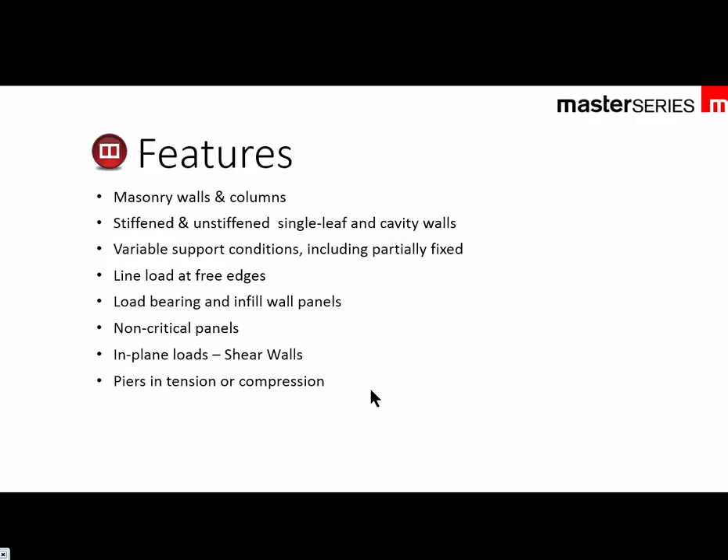Piers can be done in tension or compression, so that we can look at both directions and make sure that we're not missing something. And for those of you who have the PowerPad version, we do not do bed reinforcement. The bed reinforcement is in the full version of the MasterSeries Masonry Design, and likewise openings, either one or two openings, is in the full version.

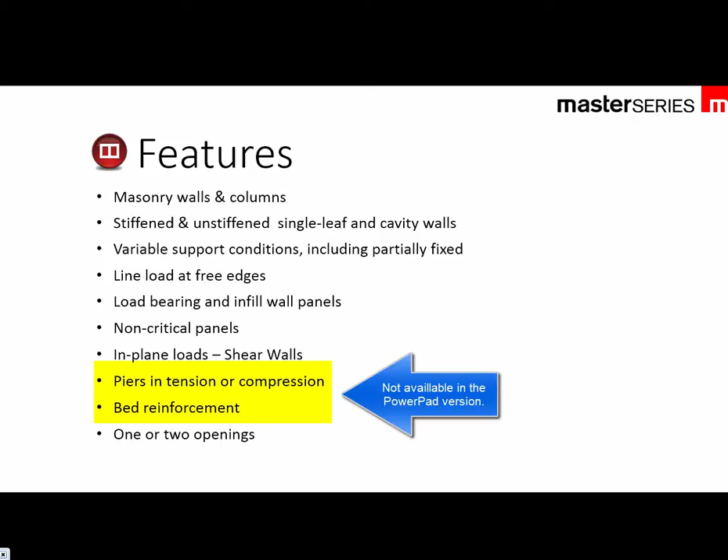Now just close this and stop this for a second. Press escape, and we'll just start on the main MasterSeries.

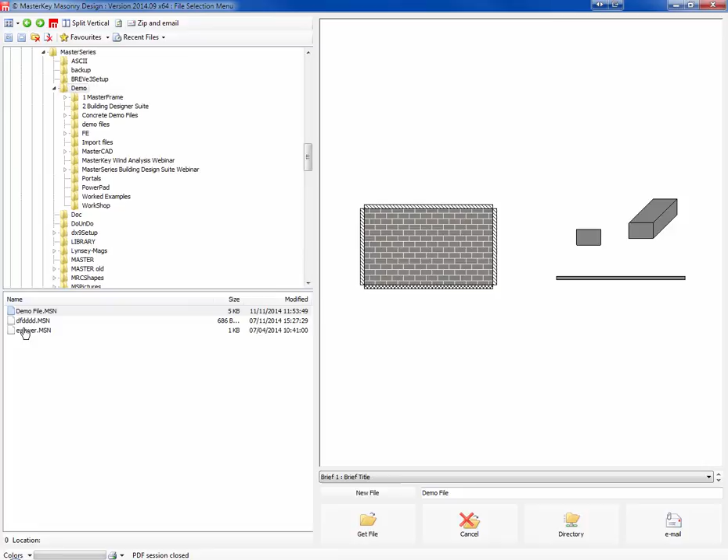So the basics of the program are very simple. It is one of the most simple programs that we have to use. It's still very powerful, but it's simple. Obviously we're seeing our wall, and we're seeing that we've got a lateral load of 0.75 kilonewtons per meter squared. It's a single leaf of 140 thick, and it's got the standard symbol for fixed edge from the code of a cross hatch on the base and a single hatching on the other three sides, indicating that we are in fact simply supported. So fixed base, simply supported edges.

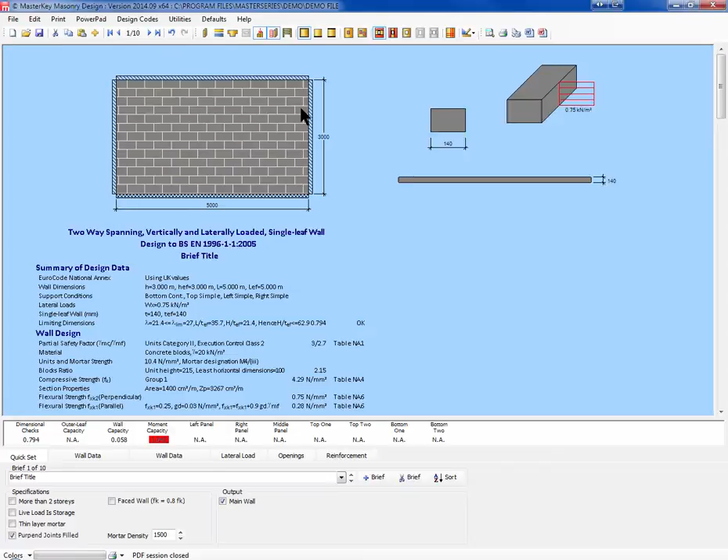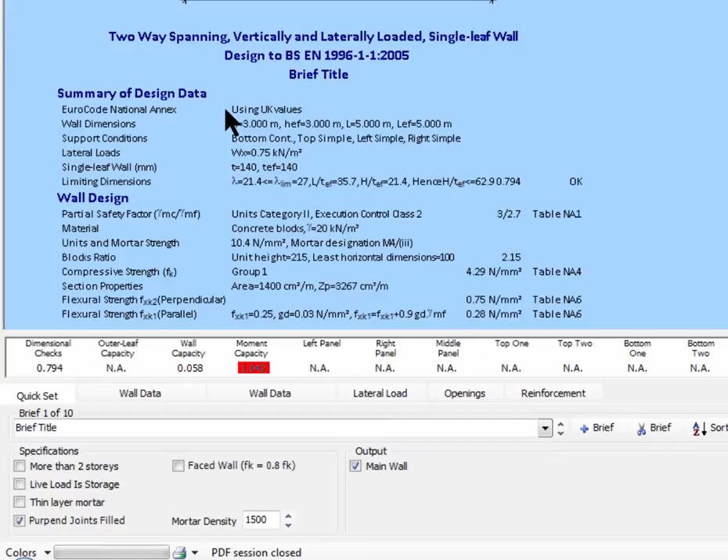The screen's blue, and that is significant. What that's telling me is that the wall is failing. Why is it failing? It is failing on moment capacity. So we can see that we are 4% overstressed, and we will take action to solve that in a minute. But let's look at some of the simple data we have. The wall data. So we mentioned that it was pinned, pinned, pinned.

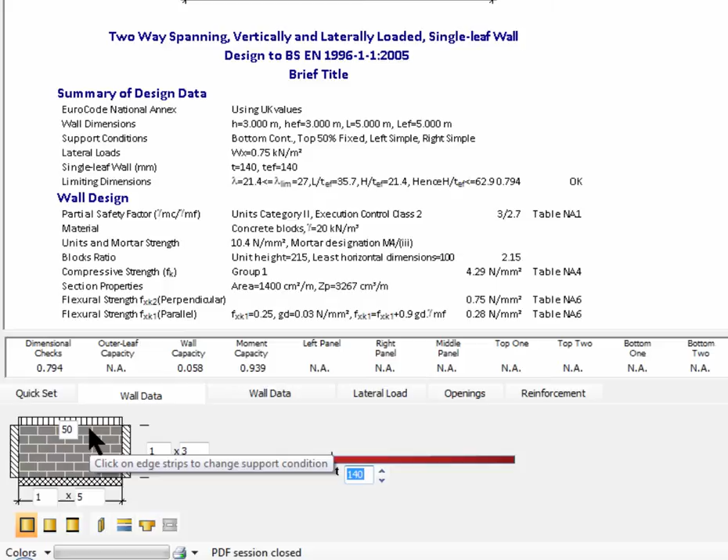And this is very simple. All you need to do is just click on an edge to make it fully fixed. Click on it again, and that's now 50% fixed, not pinned, not fixed, but somewhere in between. If you have a beam support, you might even consider putting in a minus 50%, so it's less than pinned. So it's going to give a wee bit of give, but not totally. And you can return back again, and that's a free edge, so it's unsupported altogether.

Now when we have a free edge, we are able then to apply a line load to that laterally if we want to simulate a load coming from somewhere else, if we were splitting our wall up into different location segments.

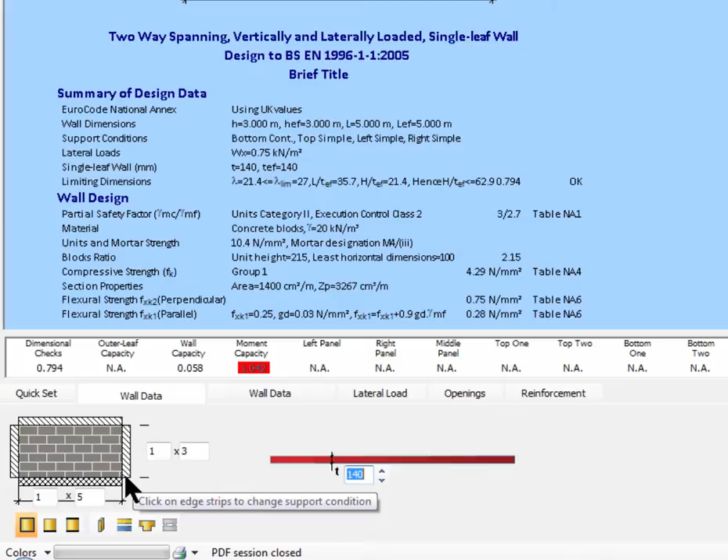So rather than change the fixity of my wall, I could come along and say my single leaf wall will work at 190 thick, or I could go and look at the second wall data tab, and here we have our material strengths. We have our concrete blocks, and of course we have our clay bricks, concrete blocks, calcium silicate bricks, autoclaved aerated concrete, stone, and natural stone. So we're into concrete blocks.

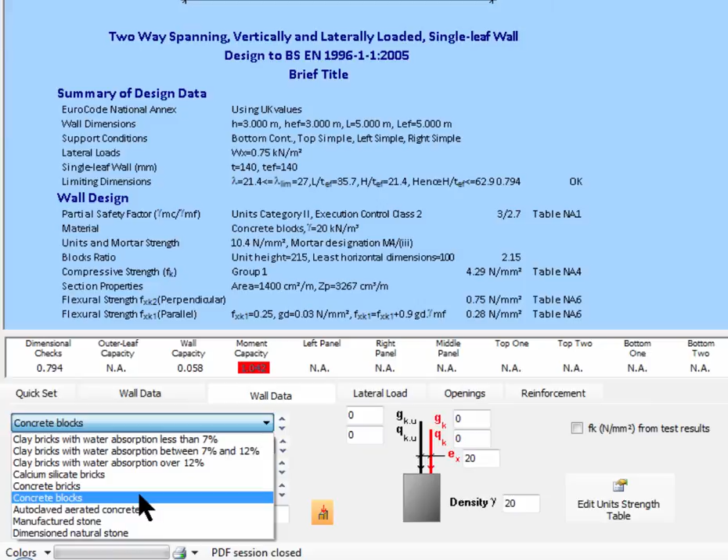Group 1, which means that we don't really have any significant holes in the blocks over 25%. And we're going to go for category 2, execution class 2, the standard unsupervised construction. And that's not working, as we said earlier. What we can do is we can change our strength, and if we go up to 17 Newton blocks, it will work. Or we can turn around and say, well, really, the blocks at least will be manufactured under QA controls, so we'll go for category 1.

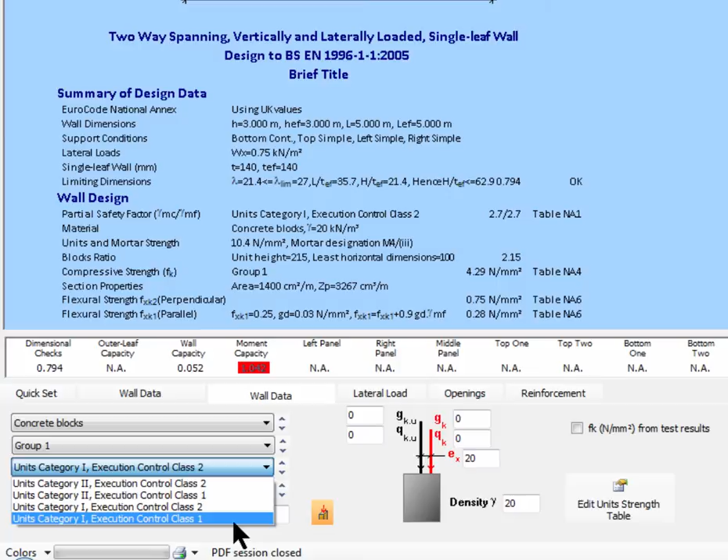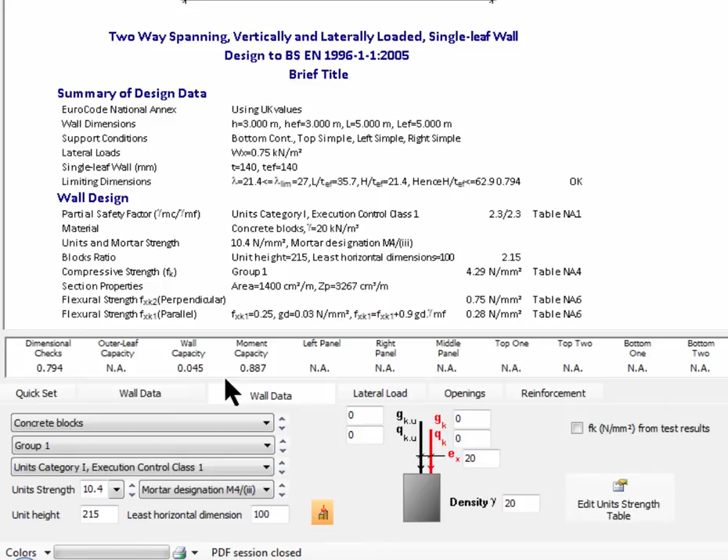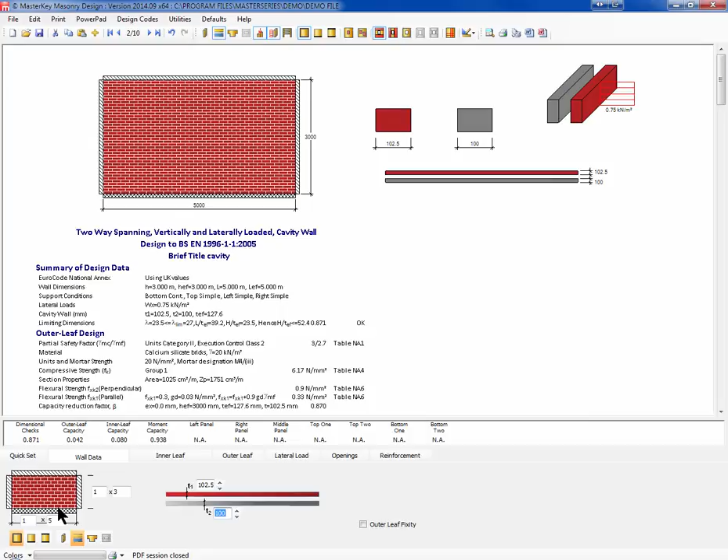So moving forward, we're now into a cavity wall. The same wall, 0.75 kilonewtons per meter squared, with a 102 brick external leaf and 100 internal leaf. Again, fixed, pinned, pinned, pinned. If I just make that pinned on the base, we now see that it's not working. So again, we can see how sensitive the wall is to the changes. We now have the data for the inner and the outer leaves, concrete blocks, group 1, category 2, class 2. So let's go for class 1. So our concrete blocks are class 1 and it's now working.

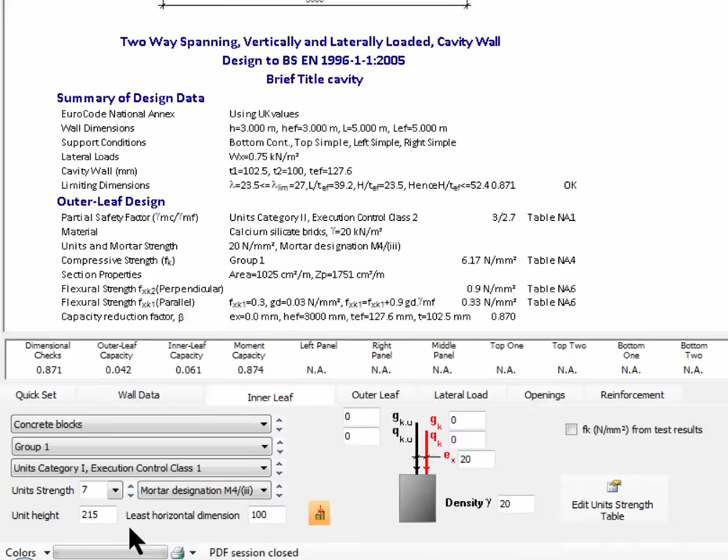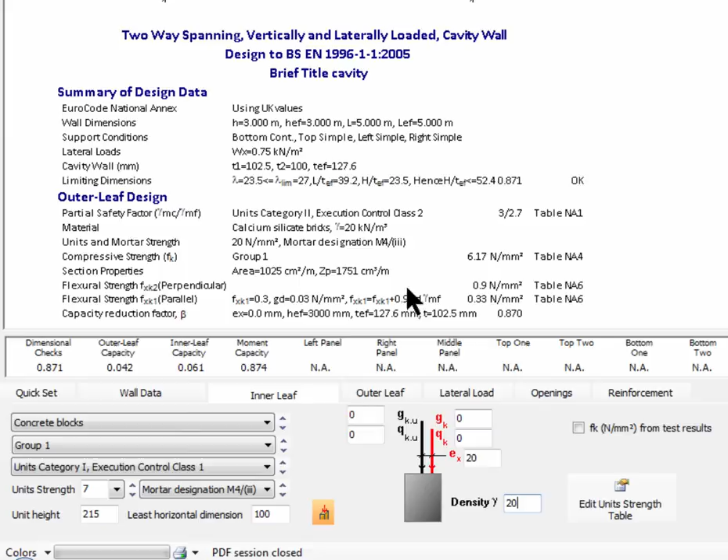What you'll also notice is that we have facilities here for applying additional load onto the wall. By default, if we put a density in, it will be enhancing the strength, so the FXK, and you then have your gravity enhancement to give you an enhanced FXK1 of 0.33. So a 10% improvement in the flexural strength parallel, which is useful. Naturally, if I started to put in some additional loading of say 10, we will see that we also get some additional strength coming out of those loads as well. I make this into 10 and we're now getting a wee bit of improvement.

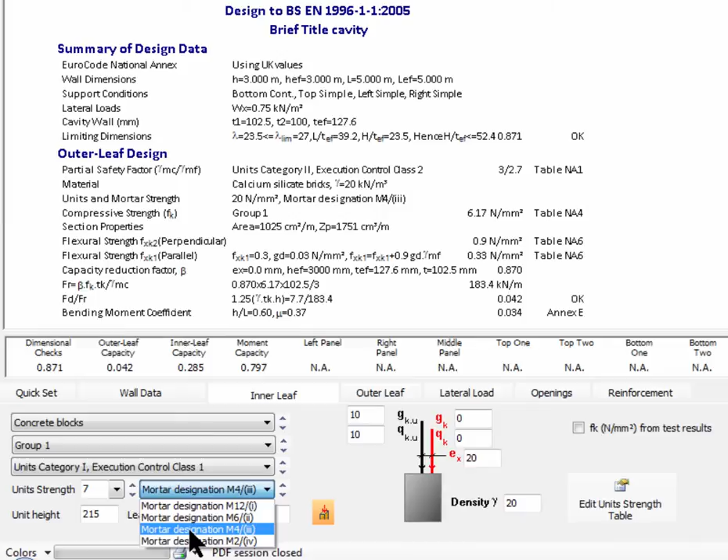There are 4 inputs here for loading, and the reason for that is very simple. These two are concentric from above. So self-weight of an upper leaf, or the loading on a floor from above, the GK and the QK, to quote the BS terminologies, are concentric from above. For loading at this level, we can then put them in eccentric by the default 20 mil or larger value if you feel that's more appropriate. Naturally, we also have the mortar designations, but they don't really give you much variation from the M4 and M6 mortar designations.

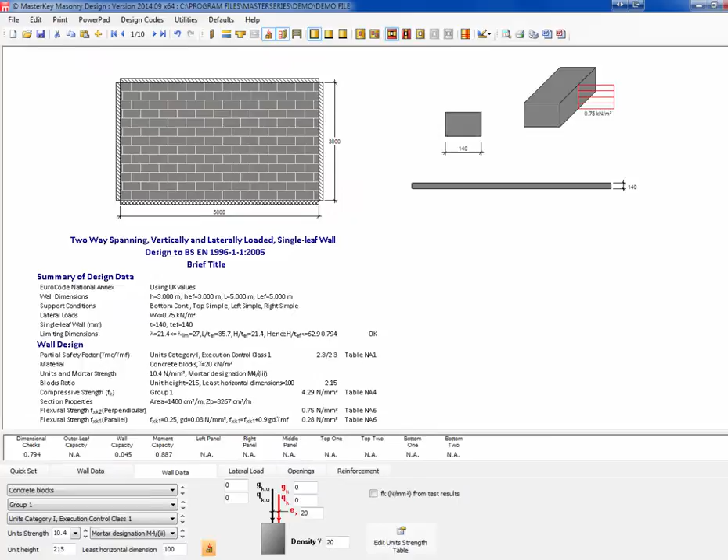Now, I just noticed when I was looking at the questions that came in before the webinar that somebody was asking how do you actually create a cavity wall? Well, if we went back to the first wall, it's very simple. All you do is you tell it that you want it to be cavity, or you tell it that you want to have a stiffened wall. Stiffened cavity wall? Yep, why not? And turn it on and turn it off. So we can turn on and off the options very easily up here. And if we look at these options, we can see that we also have the fixities, so we're actually fixed on all 4 sides, or we can go for a standalone or vertically spanning, and then we will see later on our openings in the walls.

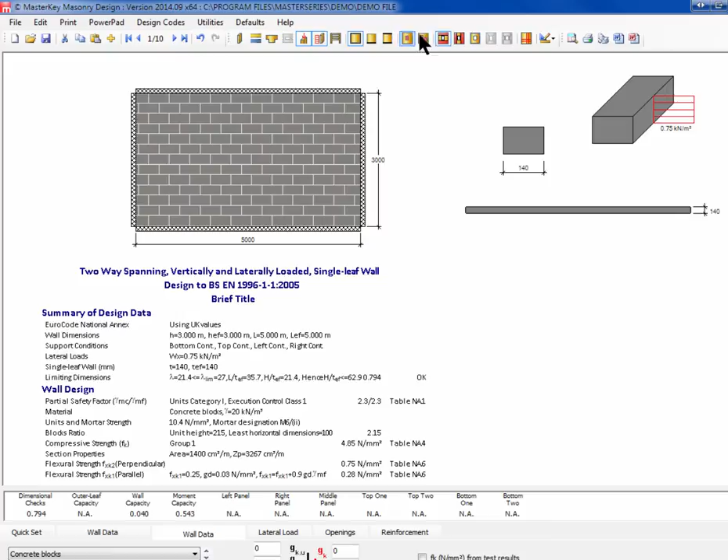So let's move across using our examples. So this was the 3rd example, and in this example we have the axial load from above coming eccentric, so it's from this level. And then we have a panel that has not got any top support. For whatever reason, we are not relying on top support, and you've seen how easy that is to remove the supports.

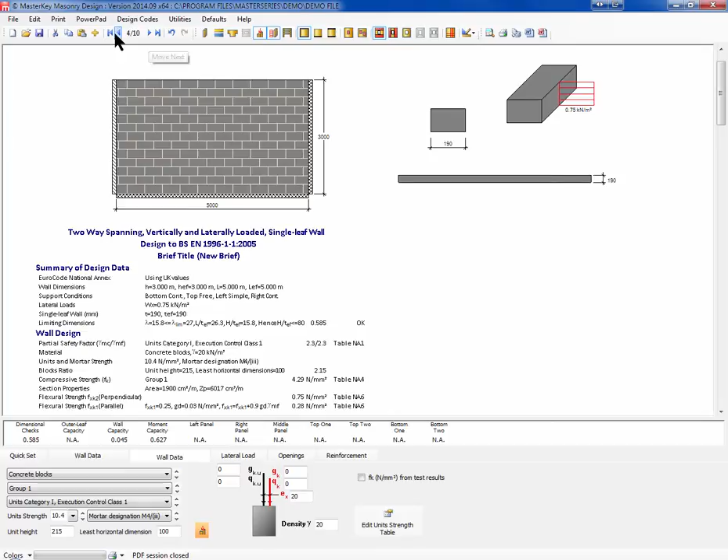The other thing worth noting is that it is technically possible to have different fixities on each leaf, and we can ask it to say, well, right, that is the inner leaf and that's the outer leaf. We're going to have expansion joints here, but on the inner leaf we're going to be up against something, shot fixed onto it, and we're going to be fully enhanced. So it's giving us a plus 50 because it's taking the average of the two.

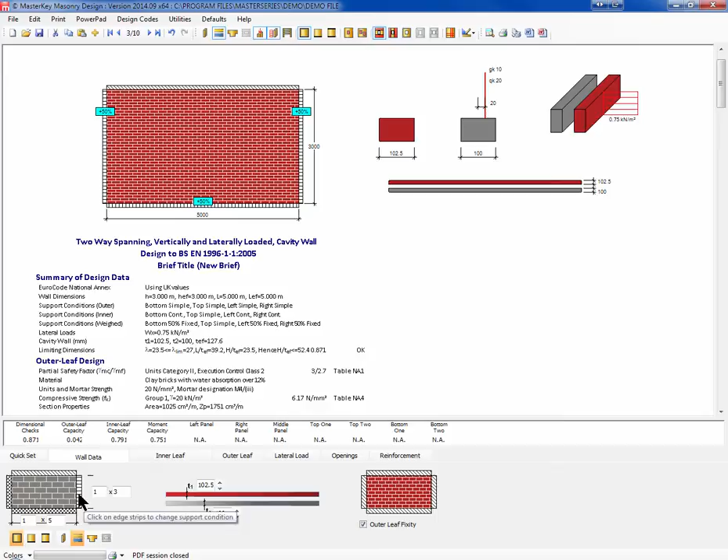Now in reality, most of the codes, certainly the British code, tell you that you don't have to do this, because if one leaf is continuous, you just assume both leaves are continuous. So I'll put that back to pinned and I'll turn that off for this example, but for those who want to do it, it is available.

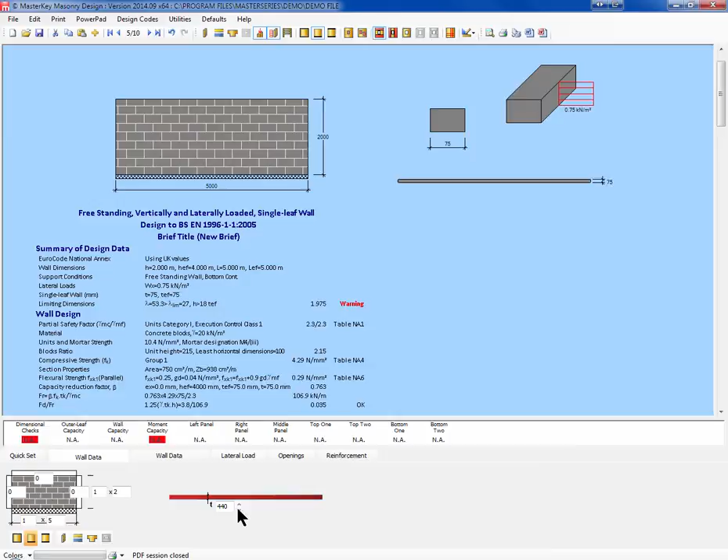Now moving forward again, we're now into our freestanding walls. A single leaf freestanding 2 meter high wall with a 0.75 kilonewton per meter square wind loading on it is going to need to be 440 thick. If I play around with that and go down to 325, it won't work, and up to 440. Naturally, we have a wee bit of scope on our blocks, but those are really for axial rather than flexural strength, so they're not really going to benefit us here.

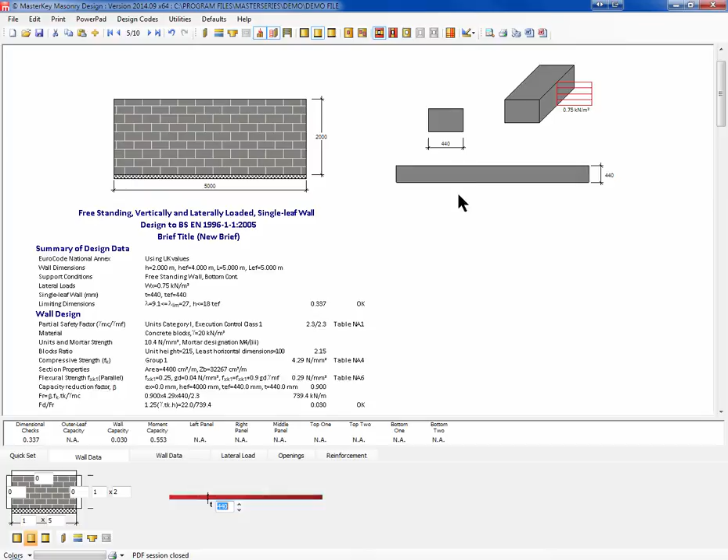And if we decided we didn't want to have a 440 wall, the alternative is to think about piers. One of the nice things about our system when we're doing piers is that you can play off one against the other. What I mean by that is very simple. If you say, right, we want a 215 wall and we want piers. Well, the piers at the minute are 1800 centers. Could I work them at 2 meters, 2.4? No, at 2.4 meters, this 400 by 650 wouldn't work.

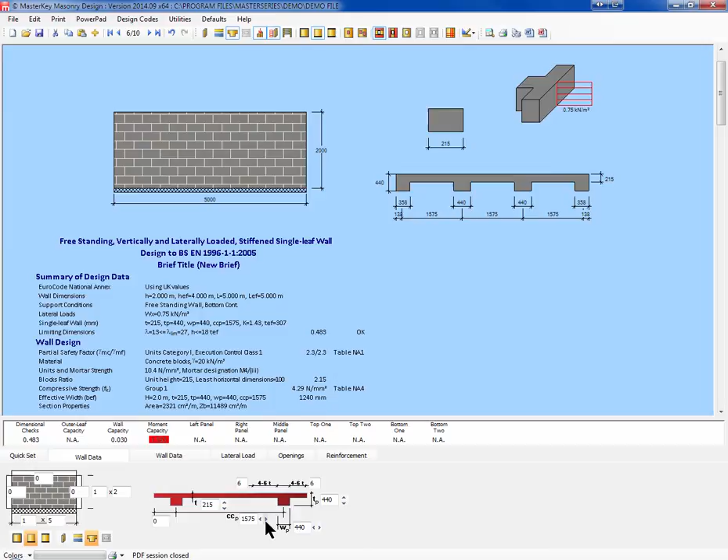If we didn't want 650, but we wanted 500 or 440, we would see that we would then need to decrease the pitches of the piers to be a wee bit unrealistic. So let's go back out to 550 and we'll see at 550 we could get away with 1300. So I think in this case it would be more realistic to take it on out to the 2.2, and we'll find that that is a more economical construction in this case.

Naturally, you also have the recourse to thin the web of the pier, and we would be down again to 1500 centres with that 325 pier. I would be fair to see something around about the 1.8 to 2 meters, so I am going to be saying a 440 pier. That is the widest we can go. So on a long run we can see how far we can get these piers apart.

So pier design is again very simple, and of course we do have this option to say whether or not the pier is in compression or in tension. So at the minute we're assuming, I would have thought, pier in compression, but we can switch it around and check that it works for both. So we really should confirm that it works for both arrangements and then design for the least. So in fact, pier in tension is the one that's least sensitive.

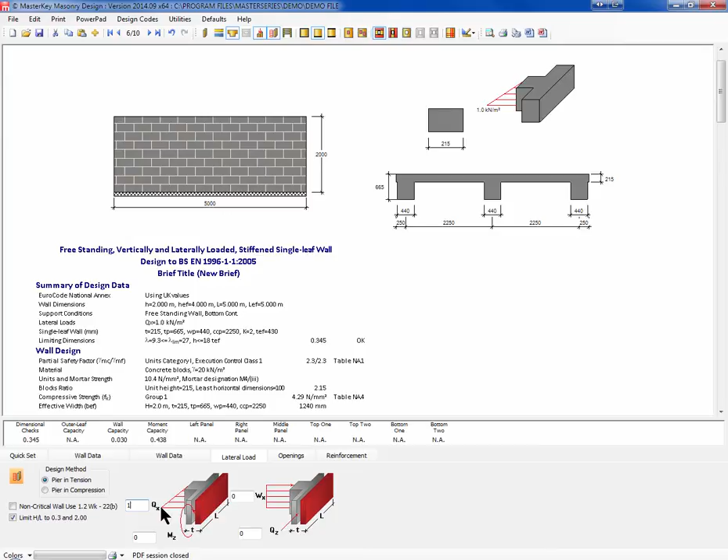So if this was not a wind case, but you were constructing this to support some sort of lateral fill, then we first of all wouldn't be using the wind load, but we could be using a triangular load. That's not a horizontal line load, that's a triangular load onto the wall, sort of as if you had grain or gravel up against this wall. And obviously with the wall rotated the right direction, we could make it so the piers are in compression, this side in tension, and we could actually reduce this.

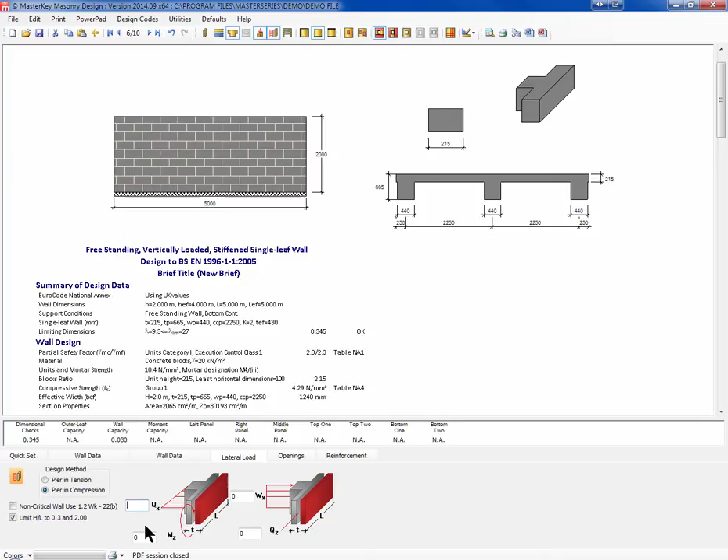If we had, say, a 4 kilonewton load, we're nearly there on our loading, and we can ask it to be non-critical and reduce things. But obviously to the Eurocode, I don't believe that that clause actually works. So if we have a maximum of 4 kilonewtons at the base, then we would need to have our walls possibly just that wee bit closer at 2 meters apart.

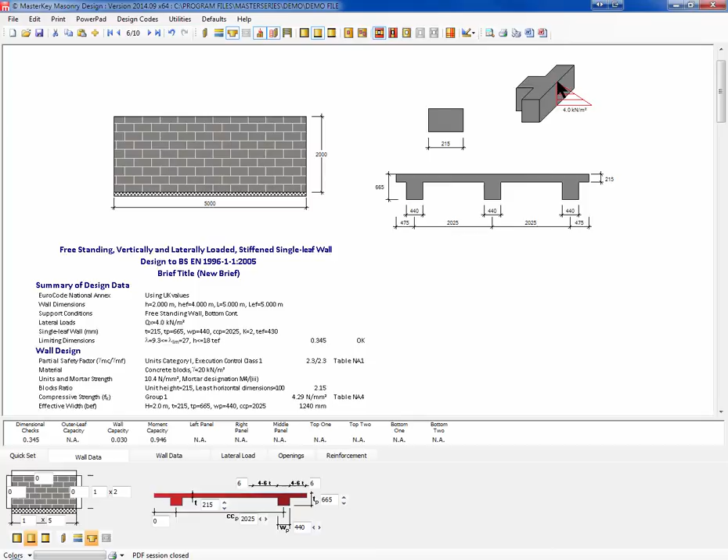So we can do the wind loading, we can also do the triangular loading. So there we have the more visually correct description of our wall load. Now, the next stage we will look at is reinforcement. So what I'm looking at here is to say, could we take this wall, could we make it thinner than 215? 140, yes. 100, no.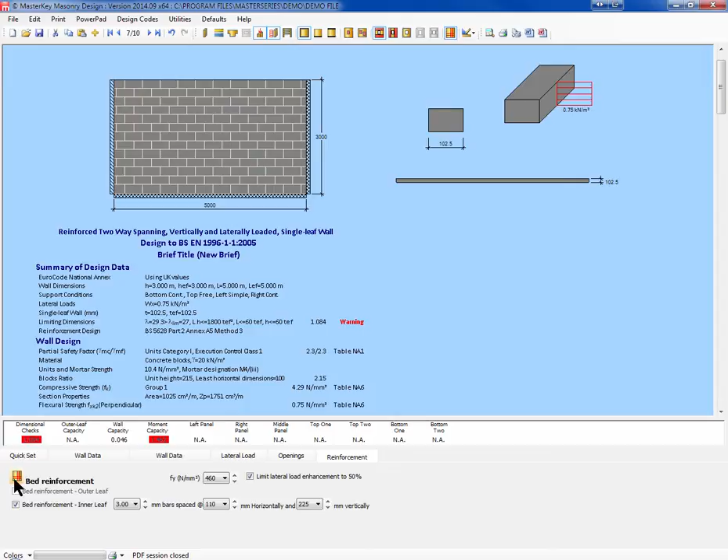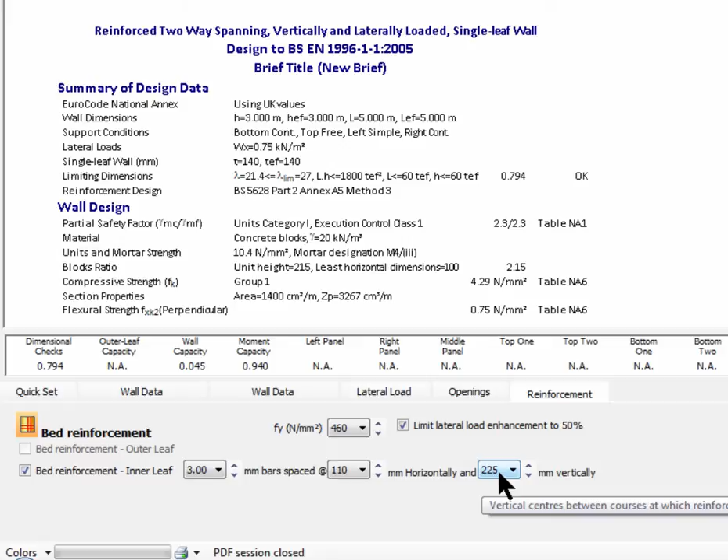So let's have a look. And in fact, I've already turned the reinforcement on. If I go back to my wall data, I will see that 140 was not working. The 190 was working without reinforcement. The 140 will not work without either strengthening the wall somehow, or in this case adding in 3mm reinforcement at 110 spacing every 225 vertically, and that will make that wall work. So quite an economic construction, and keeps our architects a lot happier.

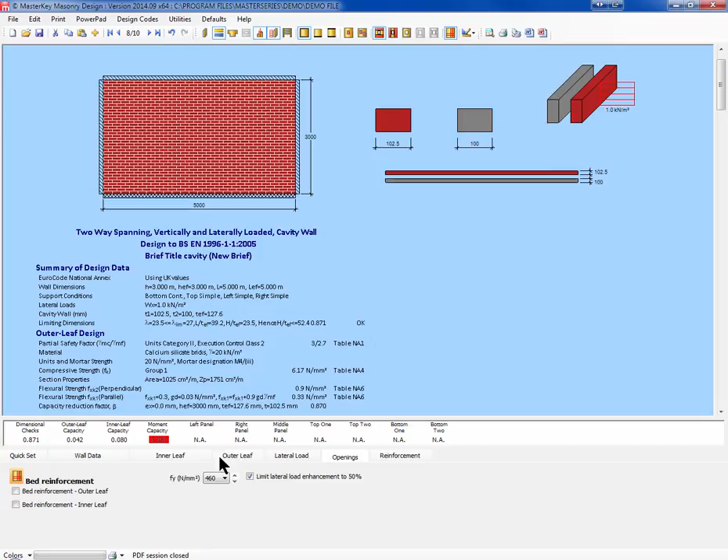So the other wall we're going to look at for bed reinforcement was a standard cavity wall. If we look at our reinforcement, we'll see there's none applied. So first of all, with our 25% overstressing, we'll put some inner reinforcement, 3s at 60 centers, now 60 apart because we're only in a 100 thick wall. So that gives us 20 cover front and back, inside and outside.

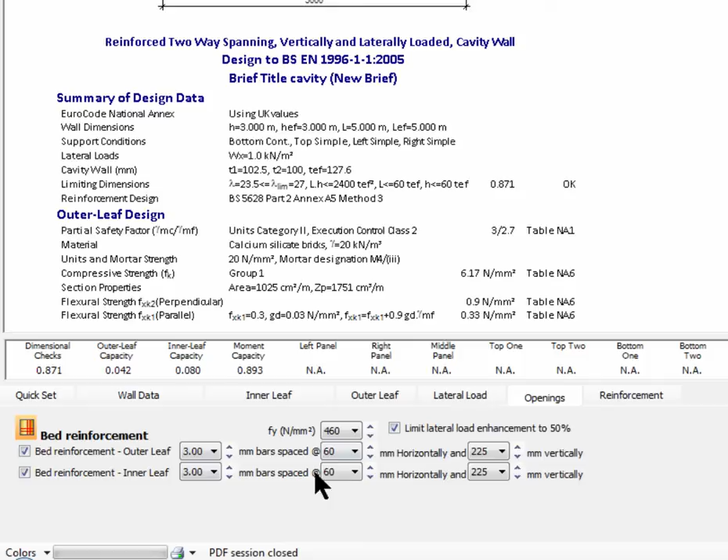So that's not enough. We could say we would get away with more reinforcement, and it's not going to allow me. So I'm going to stay with the 3mm and put some bed reinforcement on the outer leaf. So inner and outer leaves, same reinforcement, so they don't get it wrong. And that wall now works without having to go up and put in a thicker inner leaf.

So if I went to the wall without the bed reinforcement, we can see how much thicker it needs to be. So a 40% increase in that wall, 20% increase in the overall, and I'm quite sure that the bed reinforcement probably works out as a more economic solution in this example.

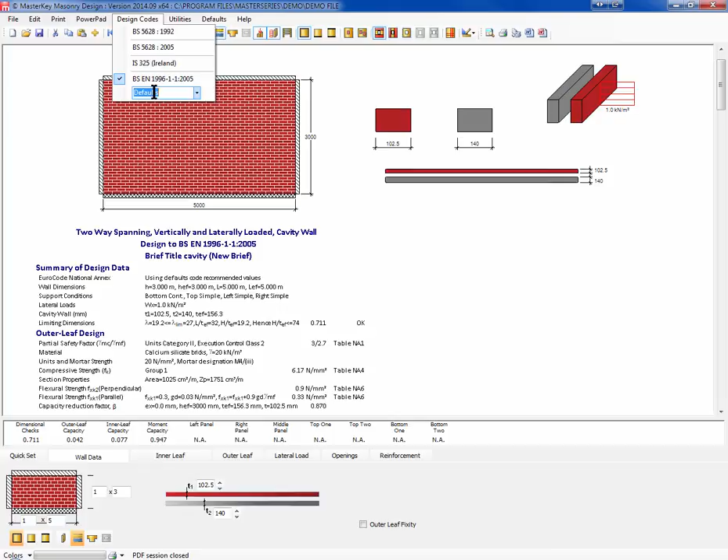utilization. As well as designing to the Eurocode, we actually are able to design to the different Eurocodes. So if you use a different set of load factors, a different set of parameters, you can actually go in and create your own set of defaults, your national application document values, your appendix values. We give you the default for what we call the Euro norm, and we also give you the British one. And you're able just to take those and copy them and edit them very simply in the front area of this program to change to a different locale. So you're able to design for your country's conditions with ease and with confidence.

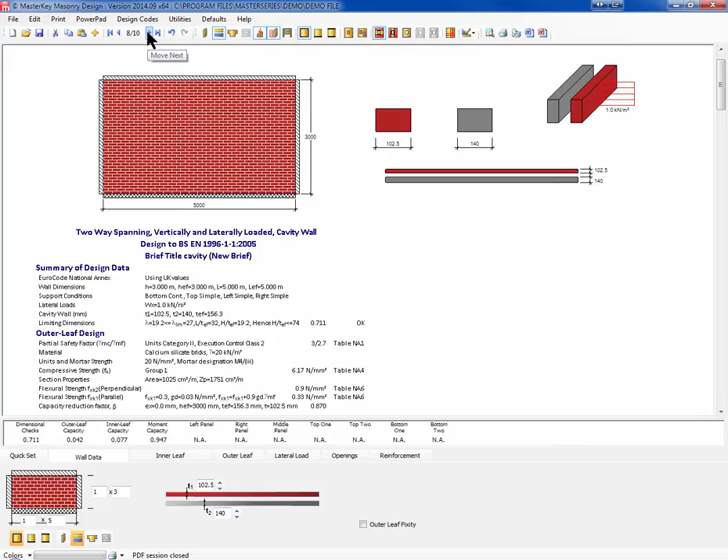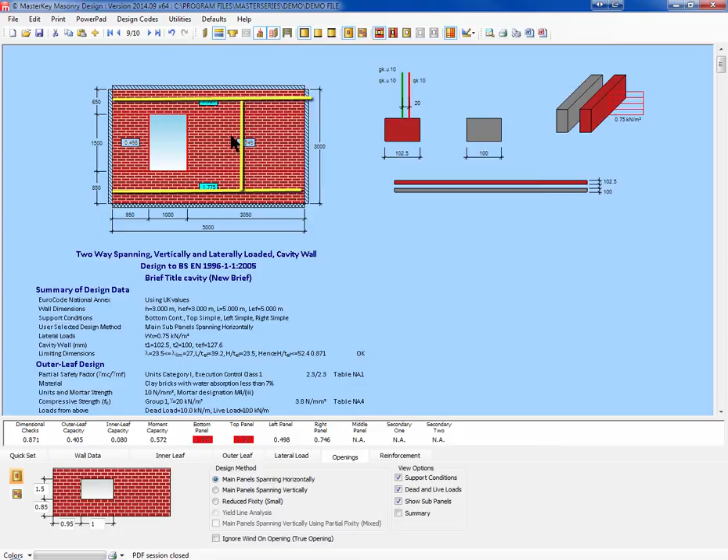The last type of masonry panel is the masonry panel with openings. The same panel again. Let's keep this simple, not change many things at once. And we have asked for an opening. So we just click on the opening button, very, very simple. And we have three primary methods. Main panel spanning horizontally, so we have a beam spanning across here, a beam spanning across here, and then this little panel spans vertically. So obviously these two beams are going to be loaded on the edge, and it's going to be crucified because it's quite a large span.

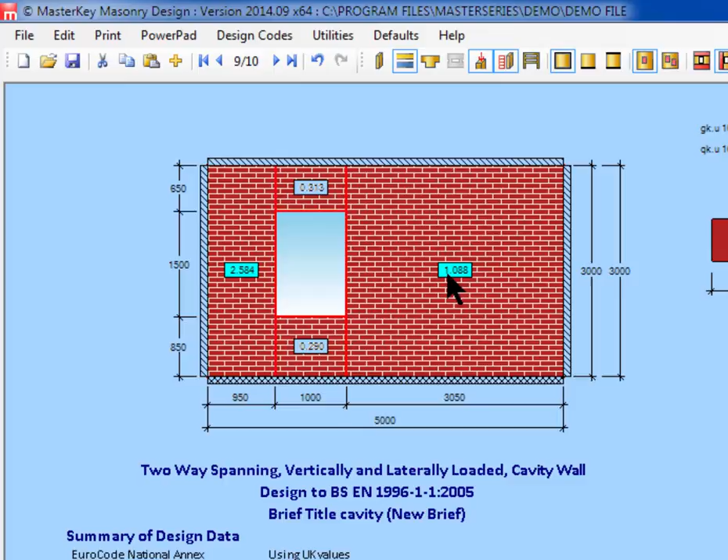If we attempt to span vertically, then we have this span working nearly, these working, and we have this one not working at all. We can, in the vertical direction, also ask to take account of the fact that it's not free the whole way along, but we have this edge component, so we're taking an overlapping approach, and that does get us down a wee bit.

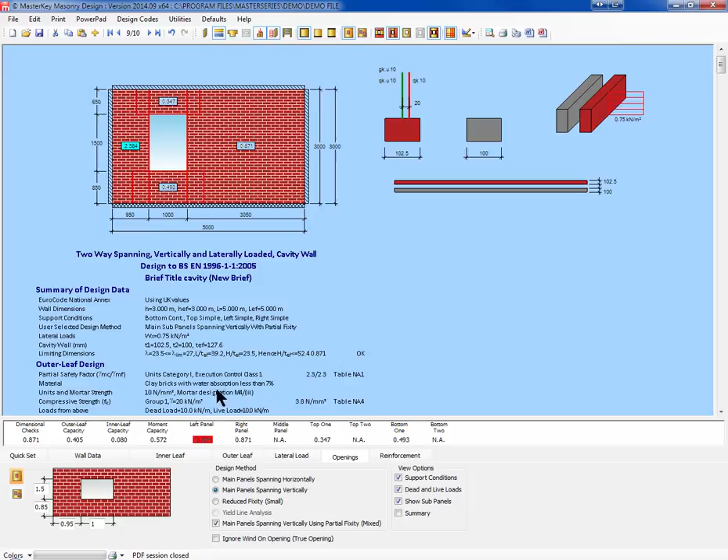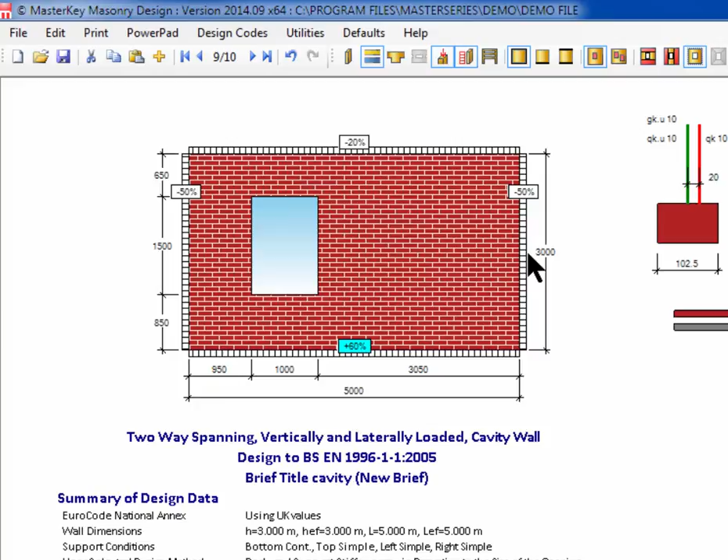But one of the best methods we find for openings that aren't enormous is the reduced fixity method, and that takes this portion of the restraint and removes it at the supports, and it takes this projection and removes it, and this projection and removes it. So we're into 850 plus 650, which is in my head 1500, so it's a 3-meter high wall. Yeah, so you can see simply we've taken half of it out here, so we're at minus 50% from 0, which is pin, to less than pin, and that is as decreed in the Structural Masonry Designer's Manual, and works very, very well for small openings.

Now we do check the size of the opening, because if I went and I made this opening 2.5, it would then refuse to do the reduced fixity method because the opening is too big.

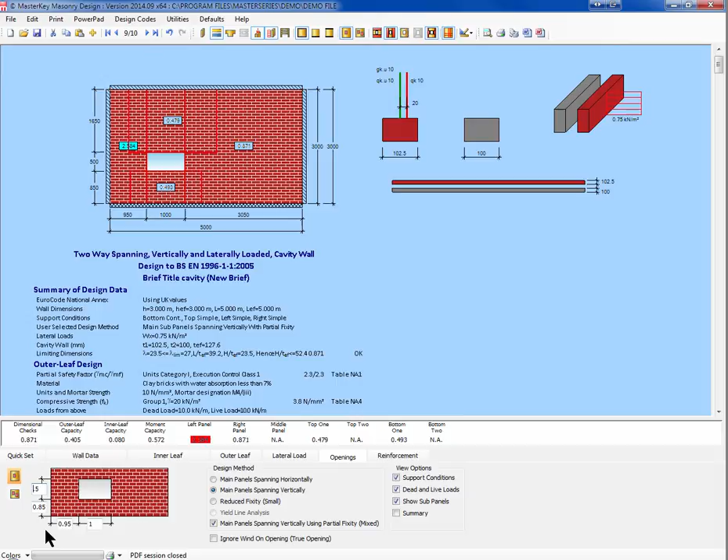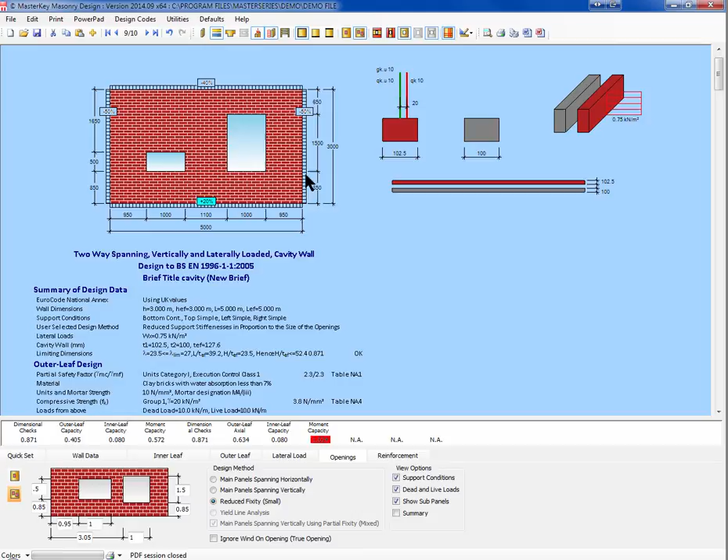And if I went obviously down to 0.5, I would need then to push it back to the reduced fixity. But we can do not just one but two openings, and we also don't have to have these openings symmetrical, which is great. In this case, with the two openings, we're down to the 50% reduction on the verticals, but we're up to like a 40% reduction on the horizontal edges.

So we do have a problem if we want to introduce two openings. And the best thing to do at this point in time would certainly be to come along and add some internal bed reinforcement. And we now have this opening panel working perfectly. So that, ladies and gentlemen, is a quick tour through the masonry panel design program.

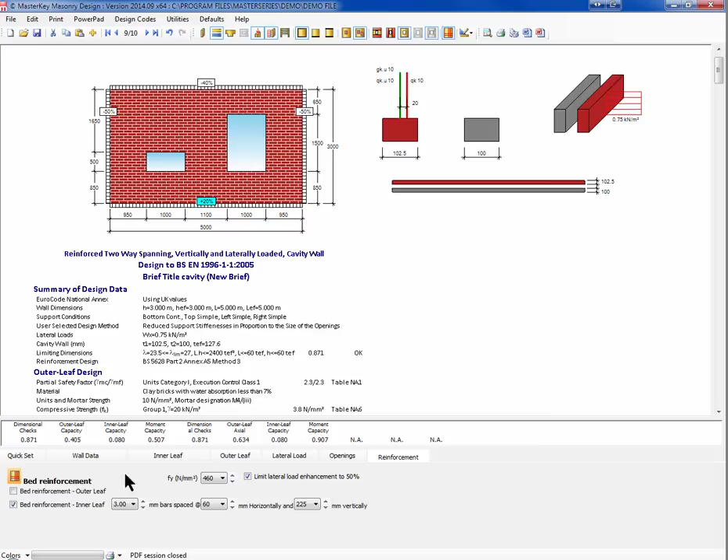I say panel design, but we also are able to do columns. And this isn't two leaves, this is the one leaf just detailed in both directions. So it's a single leaf at the minute column, which is 3.5 meters high, and it is taking quite a lot of vertical loading, 20 plus 14 concentric loading and 6 and 7 eccentric loading. Eccentrically loaded quite significantly in one of the axes, the y-axis, and quite small in the x-axis.

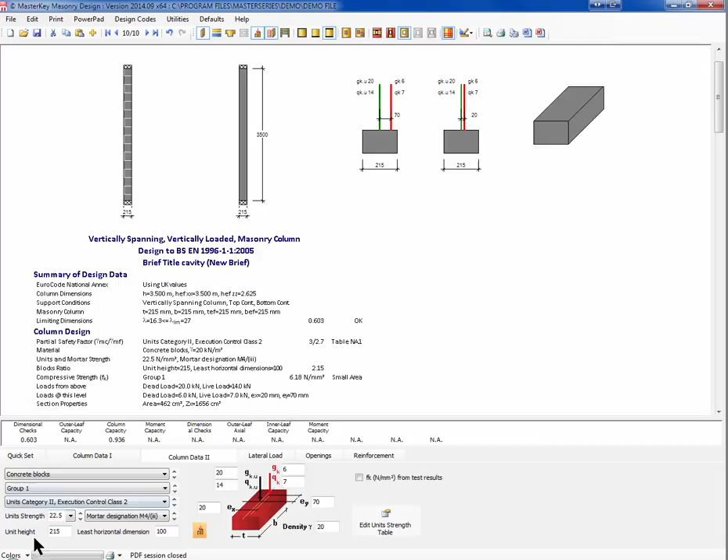We can see it works if we have units of 22.5. Remember, I said that when we come to axial loads, the unit strength is very important. When it's flexural load, once you get above about 10 newtons per millimeter square, then you get no more real additional strength in flexure. So we can see that by putting in the 22.5 newton blocks, we have a solution.

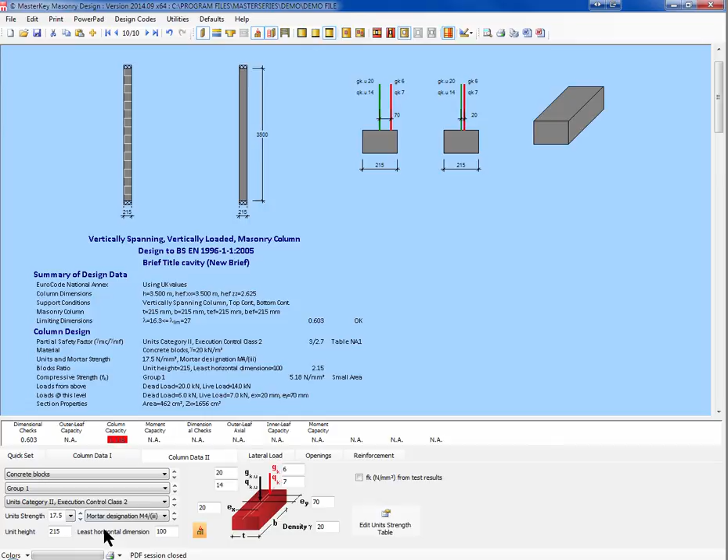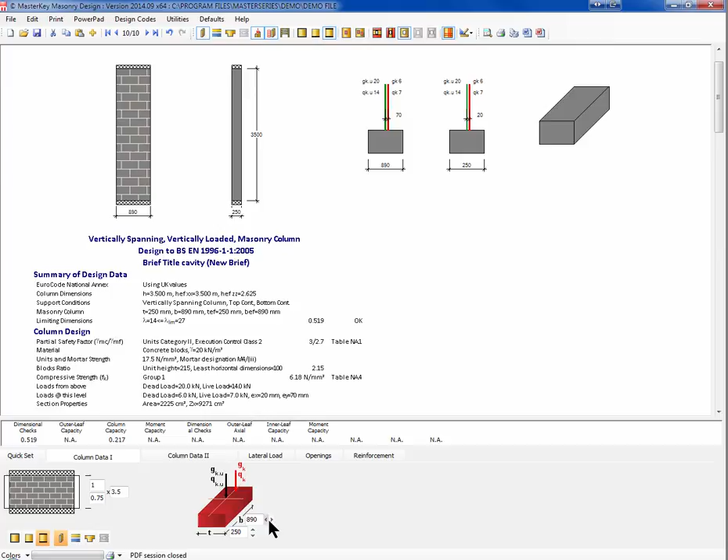Now, if we can't get 25 newton blocks, the only solution is to make this column bigger. So a 325 in that direction, or a 325 in this direction. Now we could try and argue for a special cut on the bricks to make it only 300. That would work. Or we could ask for 250 square, which isn't going to be very smart to manufacture, which doesn't work. But to me, I will go for 325 by 215 blocks.

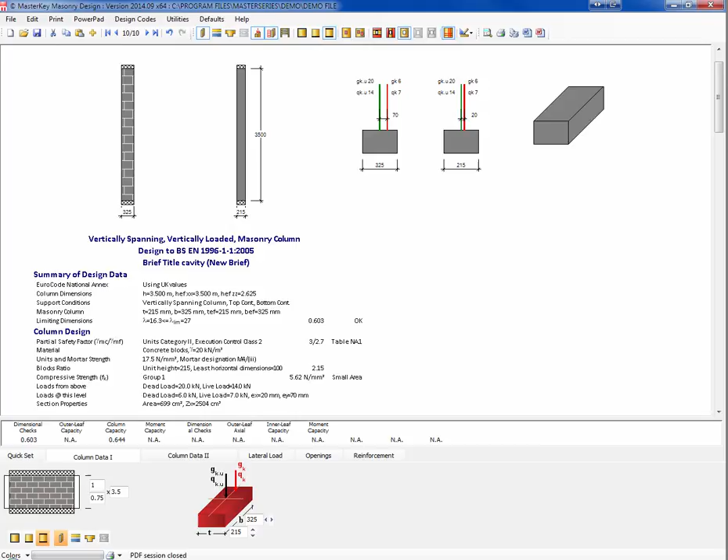So that is your program. Very simple to use. It is totally standalone from the rest of the Master Series. You can use this program without any other packages in this Master Series. If you're a PowerPad user, as I said earlier, the only thing you don't get are the openings and the reinforcement. Those buttons will be turned off. If you have the full version, you will have full access to everything else.

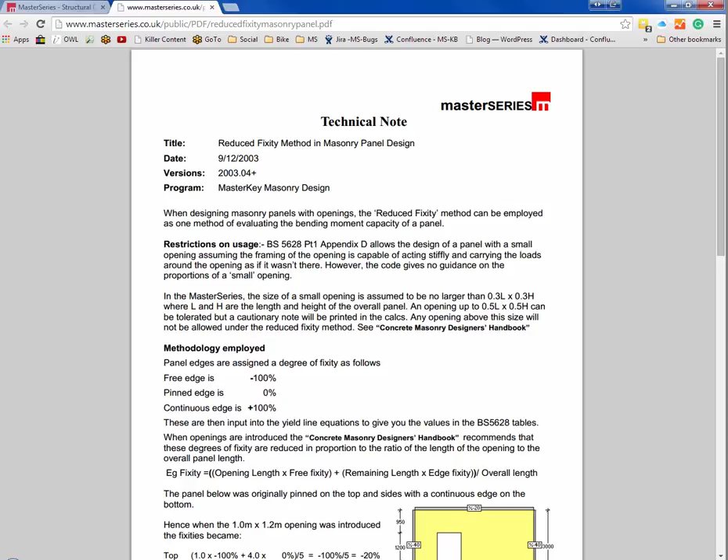And what are the benefits of using this MasterKey Masonry Design? Well, as you have seen, it's powerful and fast, and it is very user friendly. It uses the exact same interface as two of our other programs for retaining walls and composite beams. It designs to the BS and the Eurocode, and in fact historically it also designs to the Irish 325 code on masonry. It's very comprehensive.

It's not a little tool where you say, oh, I can't make it work that way, we have to go back and start again and start inputting everything. No, you can just change your configurations on the fly and say, well, actually no, I don't want it to be vertically spanning, I'm going to have to take those side walls and see how it works. Or, oh, I need to put reinforcement in.

So by giving you this rapid design turnaround, you're going to be saving yourself time, which is going to be saving yourself money, and you're going to be very economical in your design, which gives you an edge and keeps your clients happy and your contractors, that you're not over specifying the size of the walls.